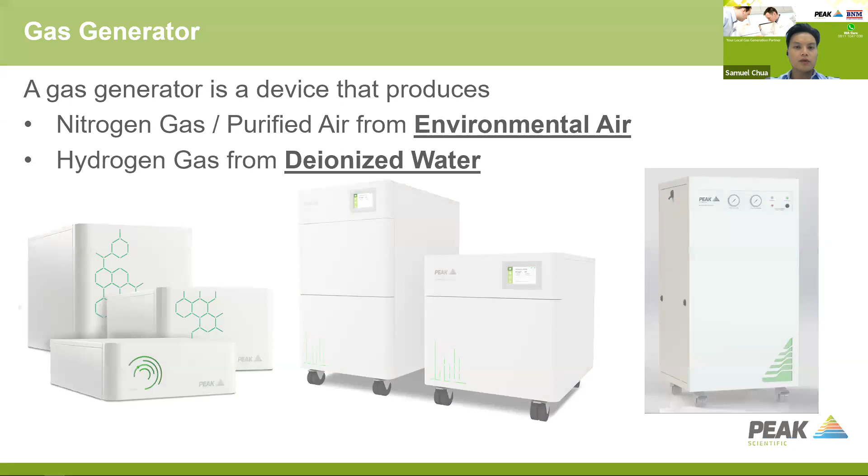So we have been talking on gas generator, we have been talking on gas. So to many of us, we might not know that there is a certain safety precaution that the facility managers or the safety managers in the laboratories are looking into, and this category is gas.

The current on-site gas storage, let's say nitrogen or hydrogen, can possess many risks. Some examples are listed in the slides here. First, handling of these cylinder tanks, because they are heavy and bulky. Sometimes the cylinder tank might be taller than any of the laboratory users, so it definitely poses a risk while transporting from point A to point B.

Next, we all realize that cylinder, tank, or dewar gas are highly pressurized. If they are highly pressurized, it can compromise laboratory user safety. We will elaborate on this in further slides.

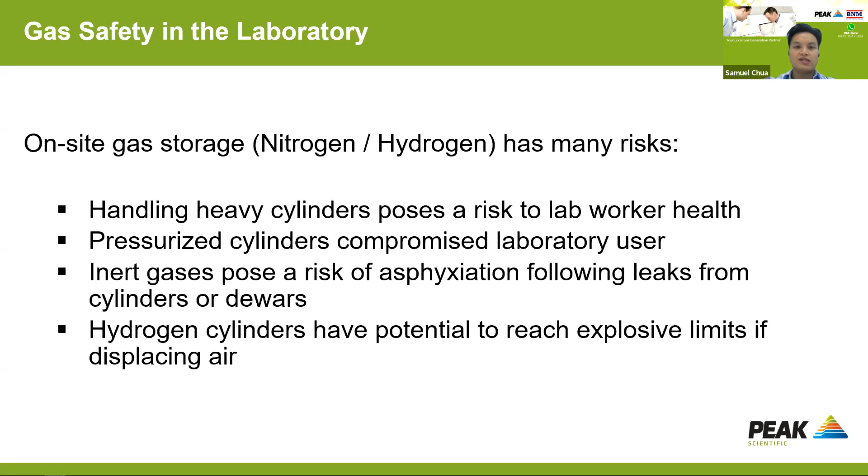Of course, we can argue that nitrogen is an inert gas, meaning it is not a reactive gas. However, do you know that nitrogen gas can displace oxygen? And last but not least, hydrogen gas has the potential to reach explosion limits, which means that if there is a certain level of hydrogen gas present in your laboratory, it can create an explosion. So these are just some of the key summaries, and now we will look into each of these safety hazards individually. Let's start with nitrogen gas.

We know that the environmental air, or the laboratory environment, is mostly made up of 78% nitrogen, 21% oxygen, and 1% other gases. Many times, it's no surprise to see that laboratories have an oxygen detector installed.

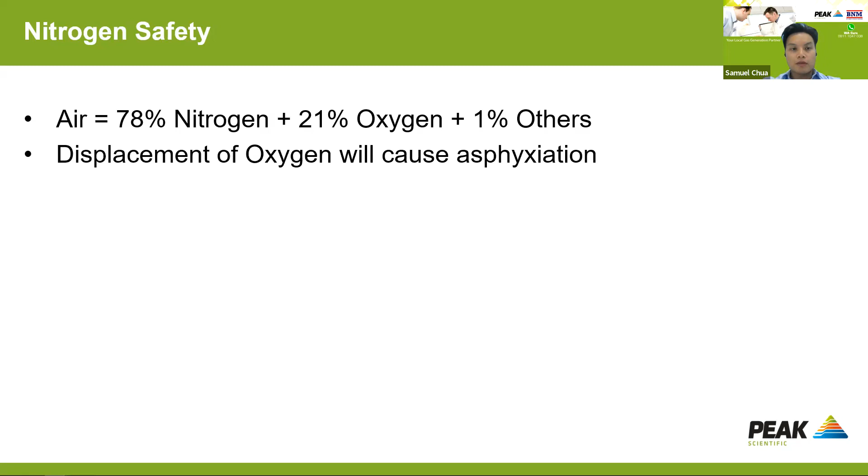But do you know why we need an oxygen detector? Because it's simple as this: nitrogen can displace oxygen. So what we mean by displace oxygen is that it can reduce the total amount of oxygen in our laboratory or working environment. For example, if we put in more nitrogen, oxygen will be reduced.

In other words, we might start to feel a bit giddy. And if we continue to add more nitrogen into the environment, it can eventually cause death, because there won't be sufficient oxygen to be supplied to our body to let our organs function.

So we have always been saying that nitrogen gas's characteristics are that it's inert, colorless, odorless, and tasteless. But it is never safe. It is dangerous due to the earlier introduction that it could displace oxygen and cause asphyxiation.

So let me put an example. Let's say I have a laboratory that measures 5 meters by 4 meters by 2.5 meters. Yes, I know that this is a very small laboratory, but we will obtain a total volume of about 50 meter cube, or 50,000 liters.

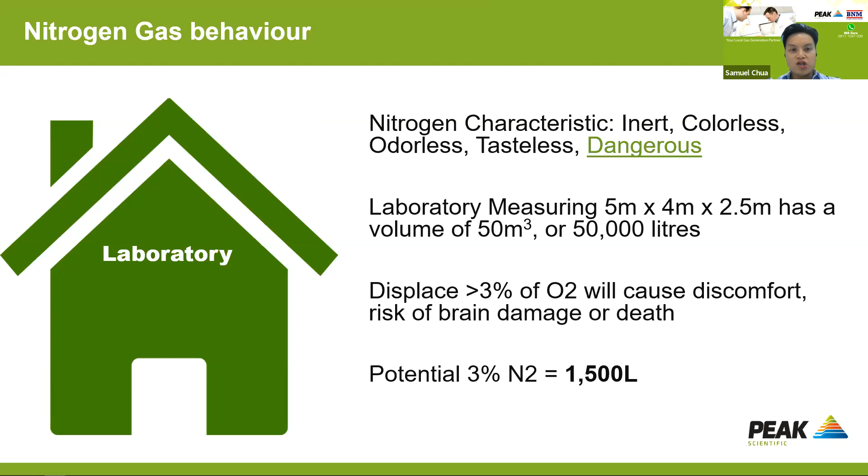Earlier on, we said that we need to safely maintain the oxygen level at 18%. So in other words, if we are displacing 3% of oxygen, or we add in a further 3% of nitrogen, it could lead to asphyxiation and eventually brain damage or death. So how much is this 3%? It is potentially 1,500 liters. I wish that you can capture this figure, 1,500 liters, because it will apply and make sense with my following slides.

Traditionally, we don't use a gas generator for nitrogen supply. So what we use in our labs, first, we have this: a liquid nitrogen dewar tank. But do you know that for a liquid nitrogen dewar tank, it is highly pressurized up to about 350 psi? And 1 liter of liquid nitrogen will consist of 694 liters of nitrogen gas.

So typically, in the lab, we might see a 100 liter or 200 liter liquid nitrogen dewar tank. But don't assume that it only contains 100 liters or 200 liters of nitrogen gas. For example, if I have a 100 liter capacity dewar tank, it contains a total of 69,400 liters of nitrogen gas.

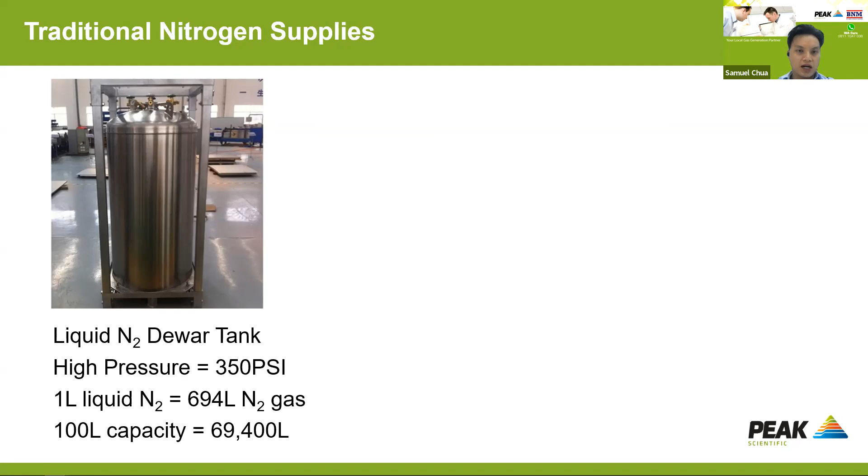Another typical supply will be what you see in this picture, a nitrogen cylinder tank. Similarly, these tanks are highly pressurized, containing about 2,000 to 3,000 psi, or 200 bar.

So one cylinder tank, when you place your order, might show that it is a 47 liter or 50 liter cylinder tank. Again, don't assume that it only contains 47 liters or 50 liters of nitrogen gas. The total gas amount you can find in this cylinder tank will be 9,000 liters.

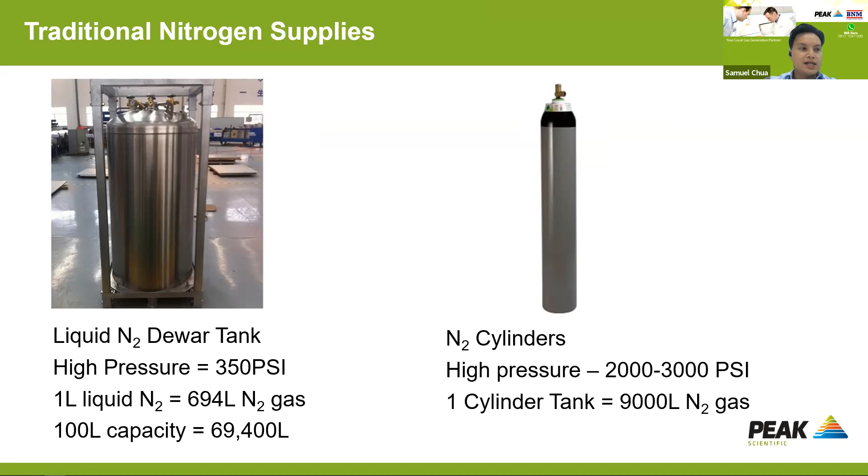So earlier on, we said 1,500 liters of nitrogen gas can reduce the oxygen level to 18% and below. So how much, or what percentage of gas, is required from this cylinder tank or even the dewar tank to contribute to 1,500 liters? This is where, today, I want to share with you that while you think nitrogen gas is inert, it could be hazardous.

Because why? In the event of a leak with this traditional supply, because it is tasteless, odorless, and colorless, we as human beings, or as lab users, would never be able to detect nitrogen until we feel giddy. And this is where it could be too late.

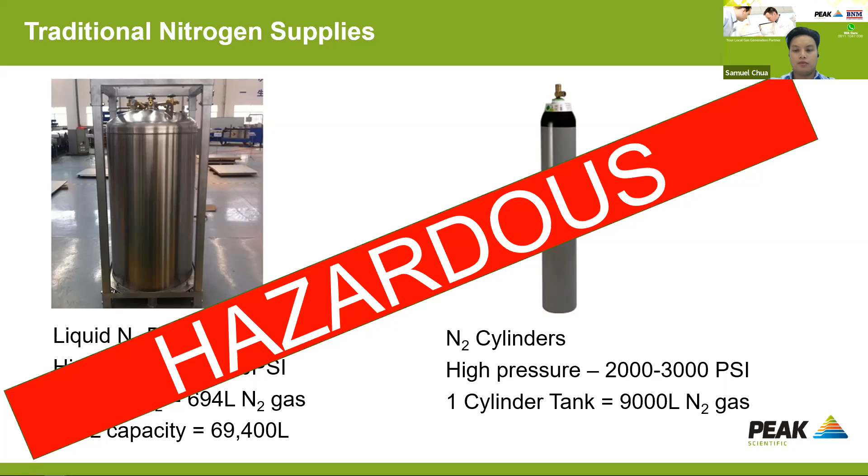So this is where I would like to share with you that to prevent all these negative issues, we always say this word: prevention is better than cure. That's where I'm here to introduce you to the gas generator. It is definitely worth considering to replace your conventional supplies with a gas generator, with the following benefits.

First, because nitrogen gas generators generate the nitrogen gas from the environment air or the laboratory air, it does not increase nitrogen percentage in the laboratory even if there is a leakage. So in simple terms, a nitrogen generator temporarily separates the nitrogen and oxygen that is in the environment, and after that it is returned back to the laboratory.

Next, these nitrogen generators are supplied by demand. So for example, if today the generator is connected to an equipment, if the equipment does not require nitrogen gas, the generator will not produce any gas until it calls for it.

Unlike the traditional supplies, generators are typically low pressure and have a low storage volume, which again highlights the safety benefits.

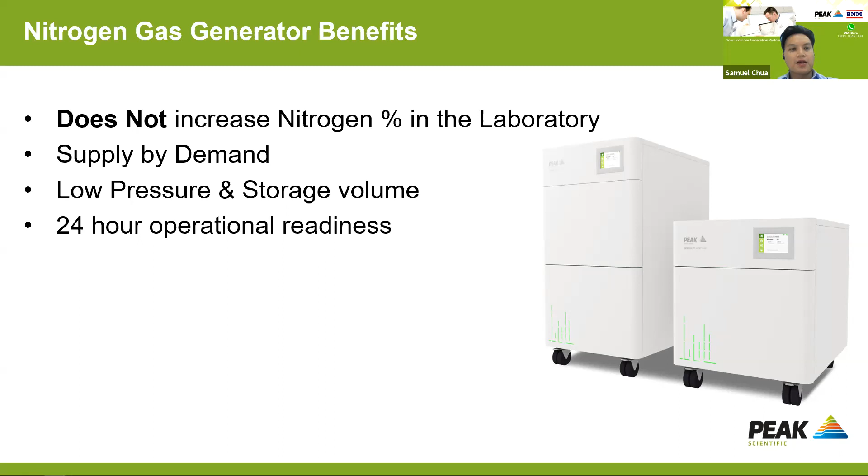Next, the interesting thing is that you would never run out of nitrogen gas with a nitrogen generator. Unlike your Dewar tank or your cylinder tank - I always joke with my customers, before you run your application, the first thing is not checking on your sample, but rather you want to check the supply of your nitrogen supply. Because if you know today you're running an experiment that requires a certain volume of nitrogen gas, and this nitrogen gas is not sufficient in the traditional supply, you are wasting your sample, you're wasting your time.

Nitrogen gas generators, because of the principles we put in place, are capable of producing consistent gas quality output. Again, unlike the traditional supplies, which most of the time we will see batch variation, like liquid nitrogen or cylinder tank. We always obtain the certificate of analysis because we are very worried if this batch of gas is similar to the previous batch, which will again affect our experiment results.

Gas generators definitely have built-in safety features. We actually prevent it from failing or becoming a hazardous issue, unlike again your traditional supplies, which don't have these features.

And last but not least, Peak branded gas generators are approved by chromatography, or most chromatography manufacturers. So this again gives you peace of mind that if you are considering a gas generator, it will not create quality issues if you are porting over from cylinder tank or liquid Dewar tank.

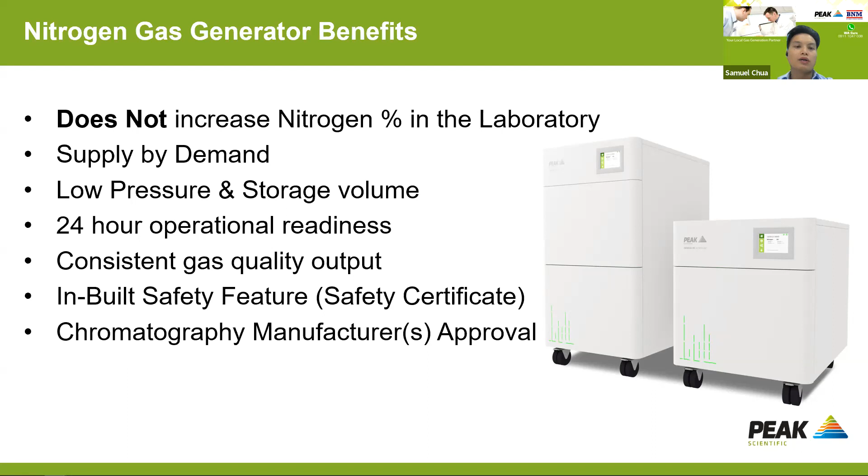Next, we talk about hydrogen safety. I hope I have covered sufficient nitrogen safety - let's move on to this. Again, I would like to use this same laboratory volumetrics of 50,000 liters, okay? And currently I'm comparing cylinder and generator.

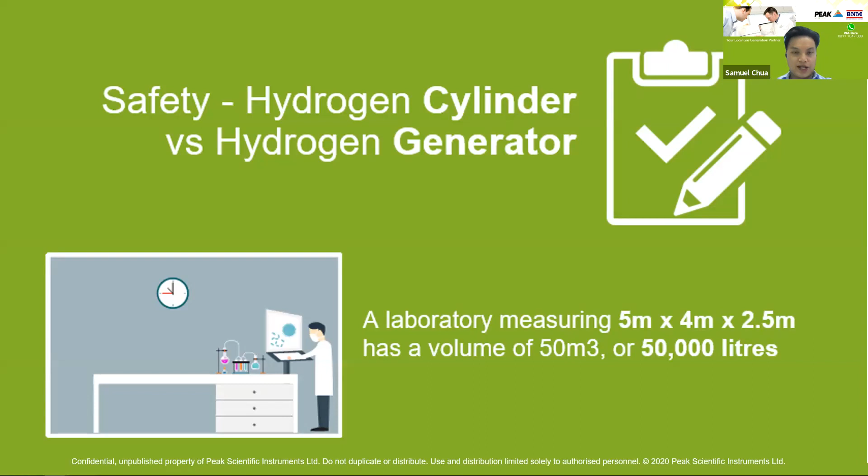We mentioned earlier on that lower explosion limits - that means the minimum presence of hydrogen gas in order to trigger an explosion. This is 4.1%. So in other words, if the environment is filled with 4.1% of hydrogen gas together along with oxygen and a spark of ignition, explosion can occur.

So if we calculate this 4.1%, it is equivalent to 2,000 liters. Similarly, the common traditional supply of hydrogen will be from cylinder tank. A 50 liter cylinder tank of hydrogen contains 9,000 liters of hydrogen gas. So earlier on I talked about 4.1%, 2,000 liters - that means approximately 25% of the cylinder tank is sufficient to meet the lower explosion limit and cause an adverse impact.

Well, you could argue, then would it be more dangerous if I talk about hydrogen generator? Because hydrogen generators never run out, they continue to produce. So let's put this example: if we are putting in 500 cc per minute, this is the flow rate capacity of hydrogen generators, it would take about 3 days to fulfill these lower explosion limits.

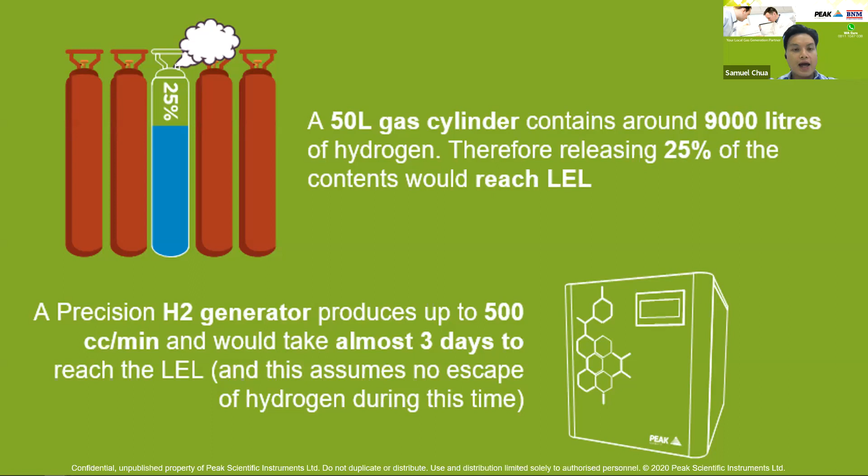And we are assuming that the laboratory has no air conditioning, there's no air exchange. So what I'm trying to emphasize here is that in reality, it is very difficult for a hydrogen generator to meet the lower explosion limit - it is near impossible. Hence we always share this quote, that hydrogen generator is a safer option for you, your colleagues, your workplace, and the environment.

There could be some questions where people start to think, okay, I might not be convinced that hydrogen generators are still safer, because at the end of the day, hydrogen gas is something we should avoid in the laboratory. So let me explain what features you could find within the hydrogen gas generator.

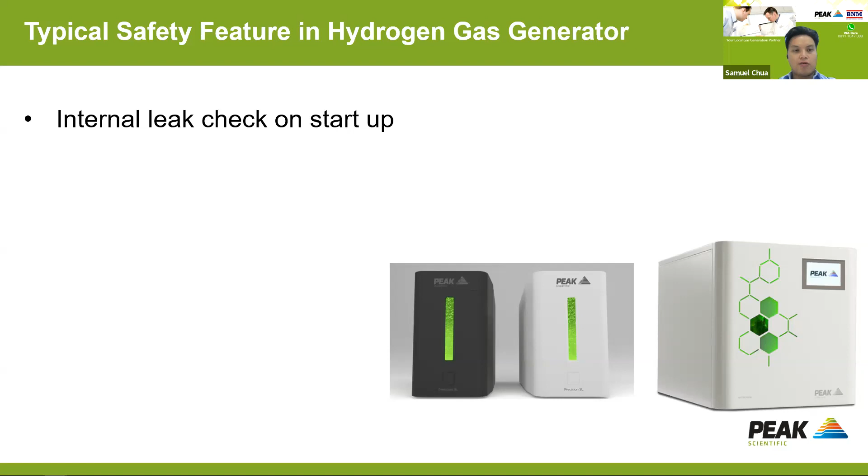First, every time you start up the gas generator, it will conduct an internal leak check. It pressurizes internally and needs to maintain the pressure within a specified time. If there is a leak, the pressure will not be maintained, and the generator will recognize that there is a leak. If this happens, you would never be able to kickstart the hydrogen generator.

Next, it also has external leak detection. All hydrogen gas generators are designed with a pressure monitoring system. In the event of an external leak, the pressure would not be able to build up. We cleverly set up the system so that if the hydrogen gas generator is continuously making hydrogen gas for 20 minutes, it will recognize there is an external leak, and it will shut down the entire system.

Coming back to this golden time of 20 minutes: if we are producing 500 cc per minute of hydrogen gas for 20 minutes continuously, how much hydrogen gas can be produced? The total is 10 liters, which is far too low to meet the LEL, lower explosion limit, of 4.1%.

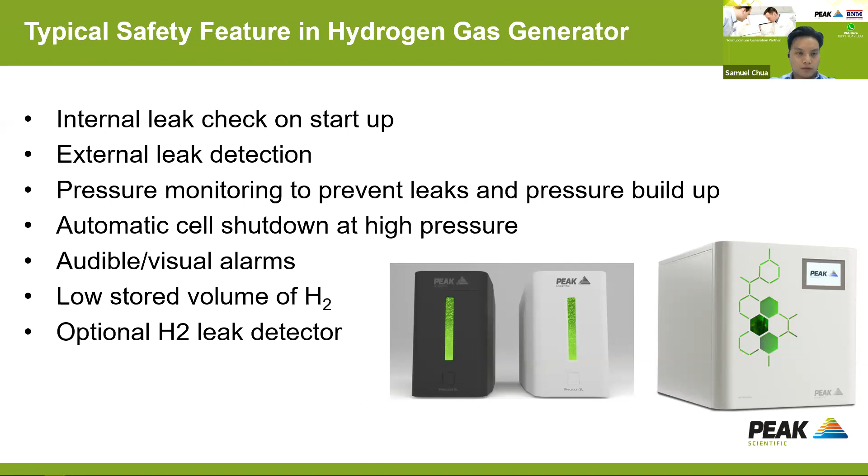So other than the hydrogen gas generator, Peak Scientific has come up with a range of gas generators, which we name the precision range, designed to deliver gas dedicated for gas chromatography or GCMS applications. This range includes dry air, zero air, which we call hydrocarbon-free air, nitrogen, and hydrogen gas. All these different modules have a similar footprint, which means they could be stacked onto each other depending on flow rates and capacity. The total height of all these generators ranges between 1.2 meters to 1.6 meters.

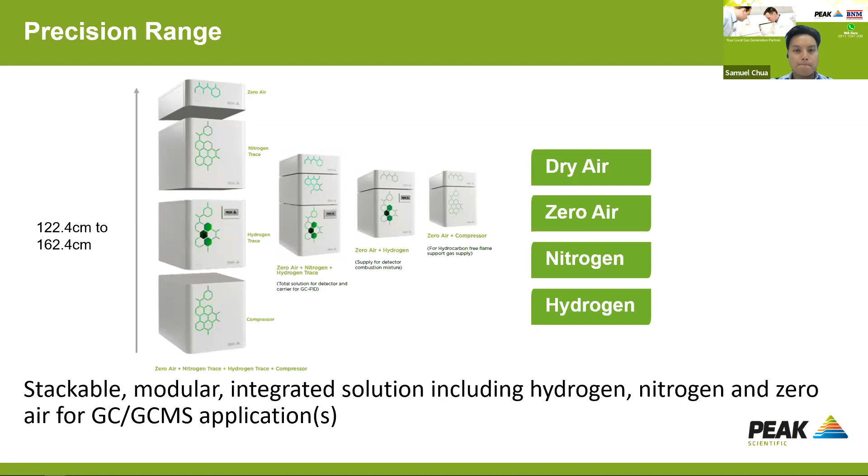So other than safety features, why should we still consider gas generators? Gas generators can be applied to a wide range of applications that we could find in laboratories. Some to name here would be liquid chromatography mass spectroscopy, GC, GCMS, FTIR, ELSD.

Before you even run your LCMS or GC, sometimes you need to conduct sample preparations, which also requires nitrogen gas. A TOC system needs very clean, dry air, a glove box, and sometimes for purging and calibrating instruments, you need gas as well.

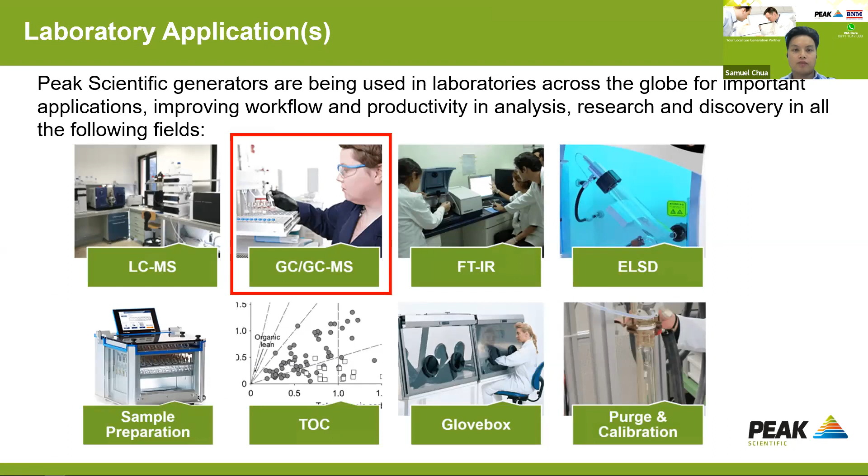With such limited time, let me just talk more on GC and GCMS applications. When we talk about GC or GCMS, one of the gases that pops up is helium, because helium is always the preferred choice of carrier gas for GC or GCMS applications. However, the key fact is that helium is getting scarce, getting lesser.

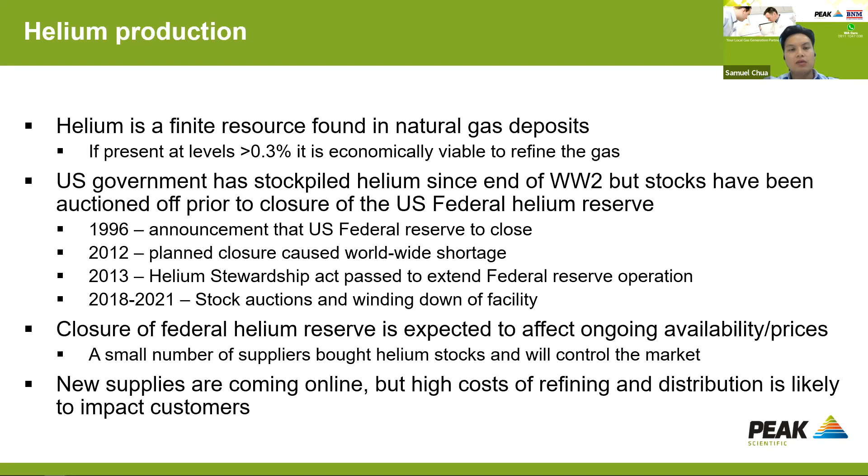So what does this mean? If the global helium supply is getting scarce to the laboratories, of course it will increase the cost of analysis. Other than increasing the cost of analysis, the operation cost will be higher.

I'm not sure if you are facing this situation, but many of my customers are facing difficulty in sourcing helium supplies, which is the helium cylinder tank. There are even reports that gas suppliers are currently limiting the number of tanks that each customer can purchase, and all these impacts will definitely create a disruption to your operation.

So what can we actually do to counter all these conditions that we are facing day in, day out? We could consider converting from helium to alternative carrier gases such as nitrogen or hydrogen. As introduced earlier in my slides, hydrogen and nitrogen can be easily produced with a gas generator.

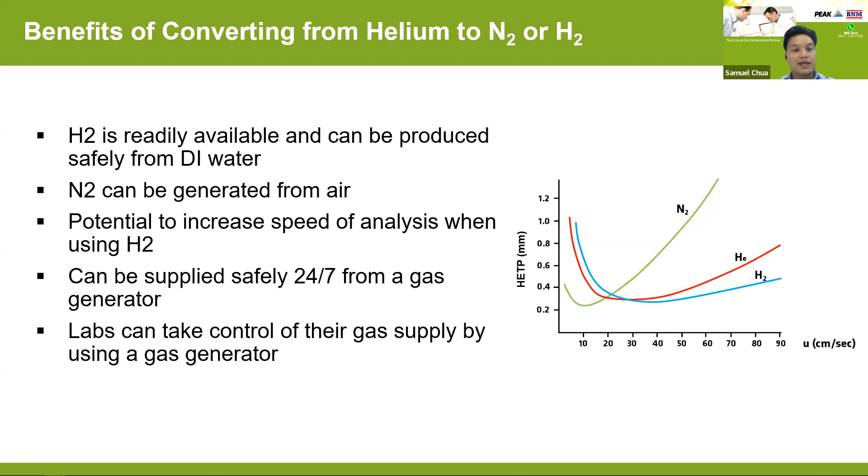Safety, definitely - gas generators offer better safety features compared to traditional supplies, because you don't need to trigger any transportation or deliveries. And of course, you are being socially responsible, being green, when you consider gas generators for your laboratories.

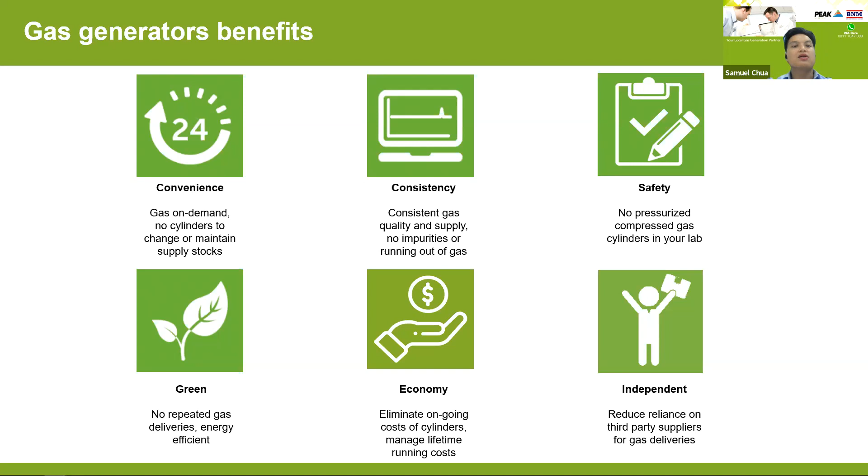Next, gas generators can also give you economies of scale. Why? Because even if you are using 24 hours of supply from a gas generator, you no longer need to order more gas from the traditional supplier. And last but not least, you are breaking away from third-party dependence - you are being independent, taking care of your own gas control.

So together with PT BERCA, we actually train up their engineers. We certify them so that we can provide local engineers that give you direct support in the field. Although Peak Scientific's headquarters, our regional headquarters, is in Singapore, we have a big team that can provide technical and field support if required.

And last but not least, Peak Scientific advocates rapid response, and we also have an ISO quality management deck. We honor same-day shipment of spare or replacement parts to maximize uptime, or in other words, to minimize your downtime. Because at the end of the day, a machine is still a machine - I cannot give you assurance and guarantee that it will never break down.

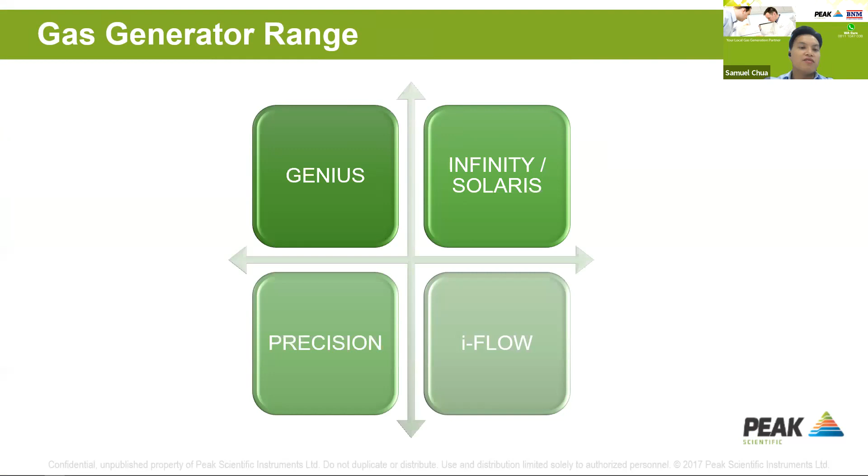Having said so much about gas generators, the next question you might have in mind is: how do we go about choosing a gas generator? Peak Scientific has a various range of gas generators for different needs, depending on the application, from LCMS all the way to purge and calibrations. So we have Genius, Infinity, Precision, and iFlow that cater for different applications.

So I have come up with a checklist to share with you. First, before we even talk about gas generators, we need to understand what application requires gas, because different applications require different gases. For example, LCMS requires nitrogen gas. If you are doing GCFID, it may require zero-grade gas and hydrogen gas.

Next, we also need to evaluate if the gas required for the application can be generated with a gas generator. So if today you come to me and say, Sam, I'm thinking about using a helium gas generator, can you provide me one? I'm sorry, I'm unable to provide you a helium gas generator, because in order to produce helium with a gas generator, I think I might need a generator the size of a big building.

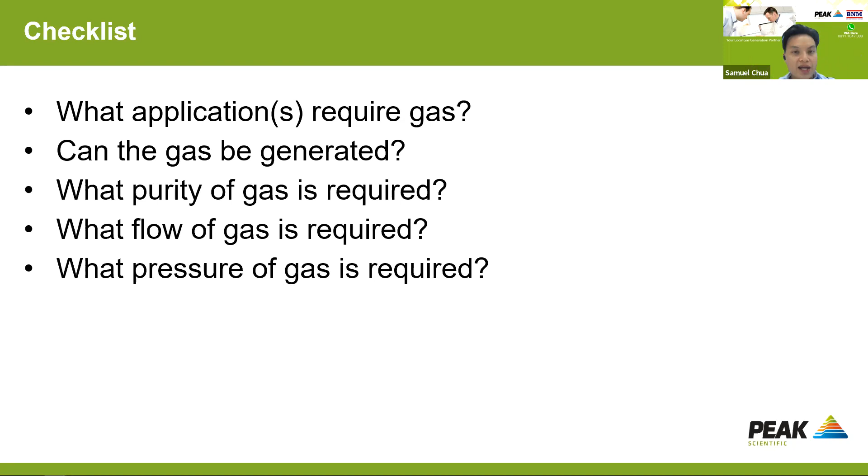Next, we also need to look into what sort of purity is required for this application, what the flow rate of the gas required is, what the pressure required is, and last but not least, do you want to future-proof for your future purchases?

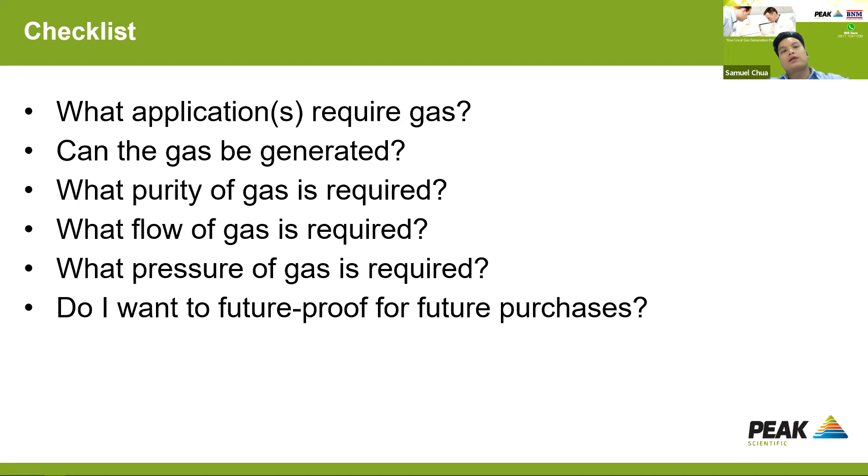For example, if currently you have 1 or 2 instruments, in the next 1 to 2 years would you intend to expand your laboratory? Would you purchase more of these instruments? If yes, I would suggest you take this into consideration for the flow rates required, and instead of just getting nice flow rates for your current application, we can take the future expansion plan into account.

Peak Scientific, if you are unaware, we have a website, and on our website we provide more information and useful links where we talk about product support and also some application notes.

So I'm pretty much coming to the end of my presentation. I'm not sure if there are any questions from the participants.